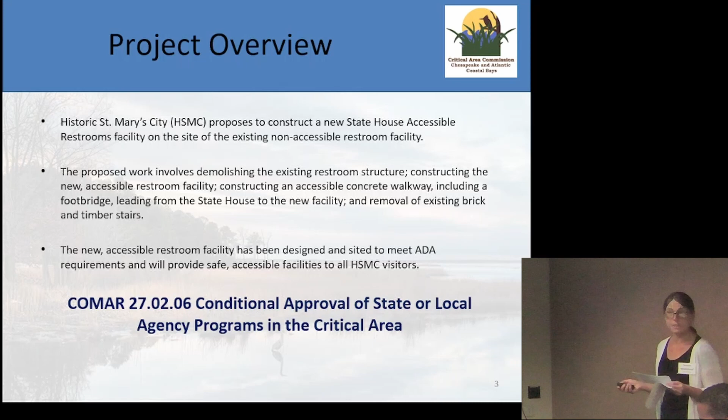This historic St. Mary's State House is a very popular tourist destination. The existing restroom facility is not ADA compliant and is located down a steep hill, accessed via brick and timber stairs. To ensure accessibility, the project includes an ADA-compliant pathway from the State House to the new facility and accessible restroom features in the interior of the structure. The existing brick and timber stairs will be removed and the area will be restored and replanted with native species. The project has an anticipated start date of fall 2022, with construction expected to be complete by spring 2023. The project requires conditional approval under COMAR by the Commission because of the buffer disturbance and impacts to steep slopes.

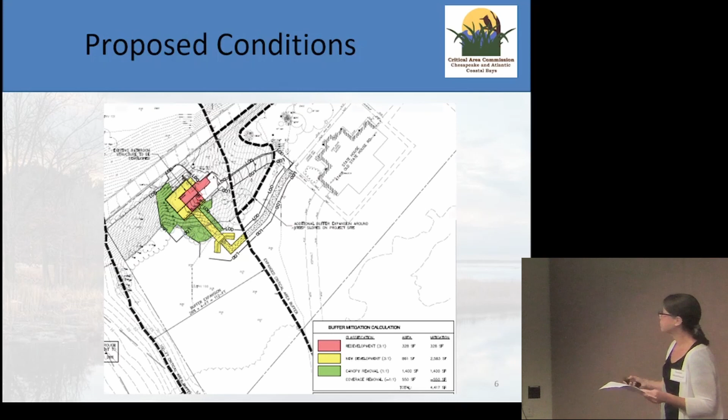Regarding critical area impacts, there are no impacts to tidal or non-tidal wetlands or any other habitat protection areas other than the critical area buffer.

Within the project site, existing lot coverage is 0.01 acres and proposed lot coverage is 0.03 acres. The overall lot coverage on the State House parcel is 14%, which meets the 15% lot coverage limit within the RCA.

As noted earlier, the project will disturb the critical area buffer. Permanent disturbance is 1,189 square feet, and canopy removal within the buffer is 1,400 square feet. In addition, 550 square feet of existing lot coverage within the buffer will be removed, and the area will be restored and revegetated.

The project is proposed by a state agency, and therefore it must meet the critical area 10% phosphorus reduction requirement, which is 0.03 pounds of phosphorus per year for this project.

Due to the potential to impact archaeological resources, no on-site stormwater management facilities are being proposed. Instead, the critical area 10% requirement will be met through planting and the installation of one 50-gallon rain barrel.

The required buffer mitigation for the project is 4,417 square feet, and 2,640 square feet of planting is required to address the 10% pollutant reduction.

The total planting is 7,057 square feet, and this will be met with both on-site and off-site plantings. Approximately 4,000 square feet of planting will be provided on-site, and 3,100 square feet will be provided off-site.

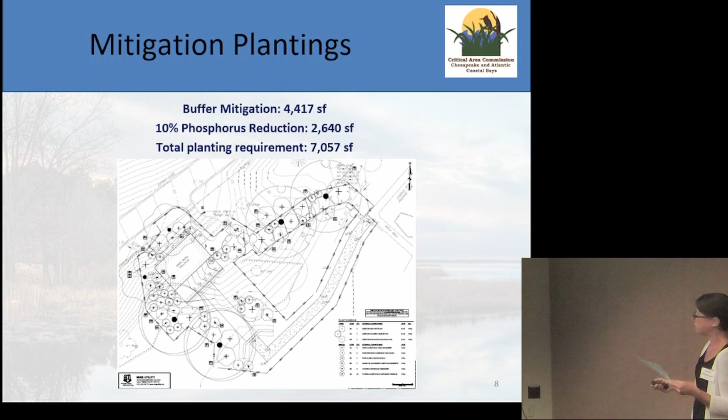So regarding agency reviews, stormwater management is not required because the project LOD is less than 5,000 square feet. Sediment and erosion control was approved by MDE on May 25th, 2022.

DNR Wildlife and Heritage Service confirmed in a letter dated April 2nd, 2022, that there are no official records of any state or federal listed, candidate, proposed, or rare plant or animal species on the project site.

And for MHT, in a letter dated June 17, 2022, MHT determined that the project would constitute an adverse effect on the historic property. Historic St. Mary's City agreed to fulfill 2 conditions related to recordation and archaeological monitoring to satisfactorily reduce this adverse effect.

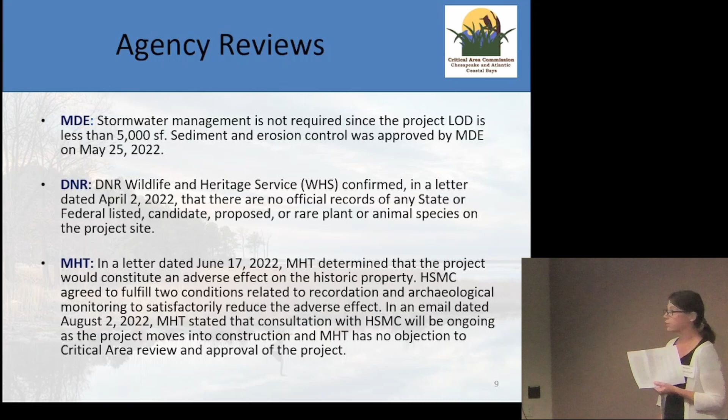In an email dated August 2nd, 2022, MHT stated that consultation with Historic St. Mary's City will be ongoing as the project moves into construction, and MHT has no objection to critical area review and approval of the project.

So COMAR 27.02.05.03 requires state agencies who are proposing development activities on state-owned lands to demonstrate that the agency has considered the likelihood of inundation by sea level rise over the course of the design life of the project, and to demonstrate that the development identifies and incorporates climate resilient practices in order to avoid or minimize environmental or structural damage associated with the coastal hazard, an extreme weather event, sea level rise, and other coastal impacts.

Historic St. Mary's City completed a coastal resiliency analysis for this project. And based on this analysis, the entirety of the project site is located outside of vulnerable areas.

The closest wetland adaptation area is a low priority area located southwest of the site. And in addition, the project is not located within the 100-year or 500-year FEMA floodplain.

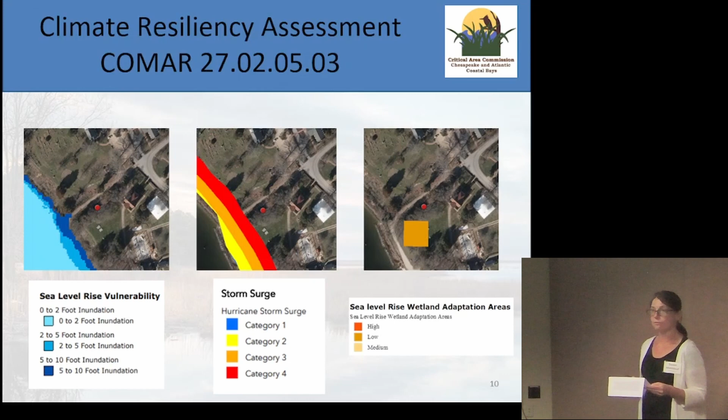As required by COMAR 27.03.01.03, public notice of the project is required. An ad was published in the Southern Maryland News on August 5th, 2022, and a sign was posted on the site, and no comments were received.

So as noted earlier, the project will result in buffer disturbance and impacts to steep slopes. Therefore, conditional approval by the Commission is required. As discussed on the next slides, Historic St. Mary's City has submitted information to meet the conditional approval requirements.

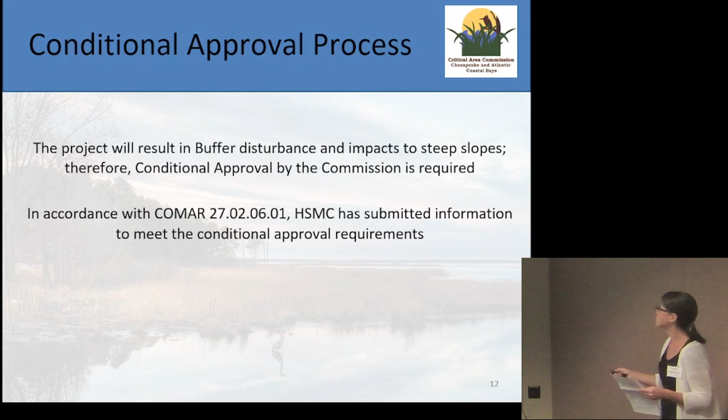So Historic St. Mary's City must show that if the law were literally enforced, special features would prohibit this project. The existing topography and the existing restroom facility make it impossible to avoid buffer disturbance and impacts to steep slopes. These impacts have been minimized to the extent possible while still achieving the project goal of providing accessible restroom facilities to all Historic St. Mary's City visitors.

Rebuilding on a site that has previously been developed also minimizes impacts to sensitive archaeological areas. The reason for this is that it avoids potential archaeological impacts at a new, completely undeveloped site. The project otherwise provides substantial public benefits to the critical area program.

The proposed mitigation plantings will provide water quality and habitat benefits both on-site and at a nearby off-site location. The plantings within the steep slopes on-site will have the added benefit of stabilizing the slopes and reducing runoff. In addition, the existing brick and timber stairs located within the steep slopes will be removed, and the area will be restored and revegetated with native shrubs.

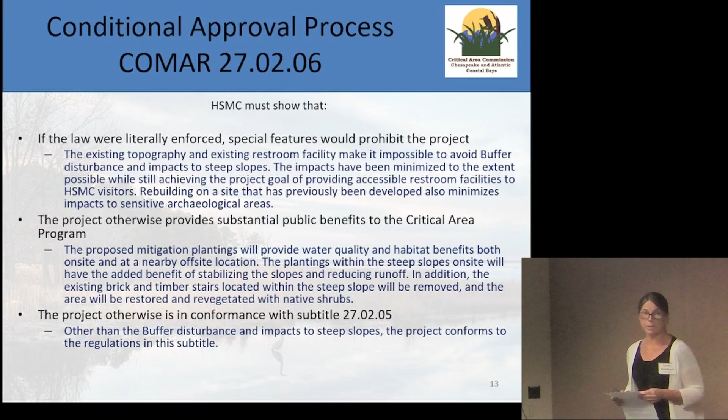The project otherwise is in conformance with Subtitle 270205. Other than the buffer disturbance and impacts to steep slopes, the project conforms to the regulations in this subtitle. So the conditional approval request must also include the following information.

Literal enforcement of COMAR 270205 would prevent the proposed activity. If the buffer disturbance impacts the steep slopes are not allowed on this site, it would prevent Historic St. Mary's City from meeting ADA requirements for accessible restroom facilities.

The proposed design includes ADA-compliant restroom facilities and an accessible pathway between the State House and the restrooms to ensure access for all Historic St. Mary's City visitors. The project conforms insofar as possible with the approved local critical area program. Other than the buffer disturbance and impacts to steep slopes, the proposed project does conform to the criteria in 270205. And mitigation measures are proposed to offset adverse effects.

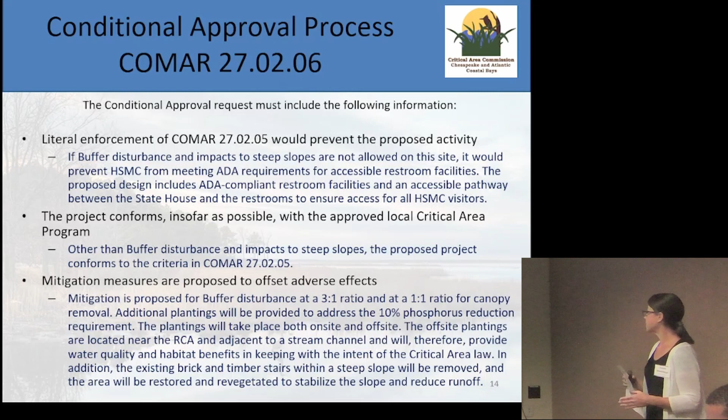Mitigation is proposed for buffer disturbance at a 3-to-1 ratio and an additional 1-to-1 ratio for the canopy removed. Additional plantings will be provided to address the 10% phosphorus reduction requirement, located both on-site and off-site. The off-site plantings are near the RCA and adjacent to a stream channel, providing water quality and habitat benefits in keeping with the intent of the critical area law. In addition, the existing brick and timber stairs within that steep slope will be removed and the area restored and revegetated to stabilize the slope and reduce runoff. So staff recommends approval of this project.

I'll turn it back over to Ms. Hertz for discussion of questions. I have a question. You mentioned about the canopy, the replacement of the trees. Why do you always do just a 1-to-1?

Because probably half of the trees that get planted die. For the buffer disturbance itself, it's 3-to-1, and then there's an additional 1-to-1 - that's the requirement in COMAR. So for every tree you take in a buffer, you plant 3 for the buffer disturbance, and any other additional tree outside the buffer is on a 1-to-1 basis. For canopy removal within the buffer, it's 1-to-1, so it's an additional requirement on top of any buffer disturbance - so it's actually 4 in the buffer and then 1 outside the buffer. Okay, gotcha, thank you.

You're welcome, thank you, good question. Any other questions from Commissioner? It was a very good presentation. Thank you, I certainly plan to approve this.

I just have a general question. It sounded like there were going to be archaeological impacts, whether on this site or a new site, and I was curious if any alternatives had been considered at a different location to avoid buffer impacts.

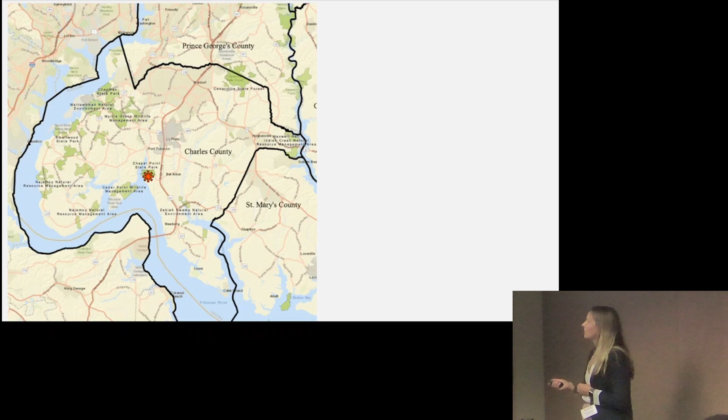The proposed improvements are part of the lease agreement, as I mentioned earlier, between Maryland Park Service and Charles County Department of Parks, Recreation, and Tourism. The terms of the lease agreement were based on a jointly prepared and approved management plan to better define access, shoreline access, and parking areas.

Just before we get into it, a little brief, interesting history of the site. It houses the oldest Catholic parish in continuous service in the U.S. It's called St. Thomas Manor at St. Ignatius. It was founded in 1641 by Jesuit priests.

In the 1880s, the Jesuits formed a joint venture with the Howard brothers to build the Hotel Bellevue. This was a riverside resort to draw people in from Washington by steamboats. In the 1930s, a gentleman named Ben Bowling purchased the property from the Jesuits to build an amusement park called Chapel Point, the Pride of the Potomac.

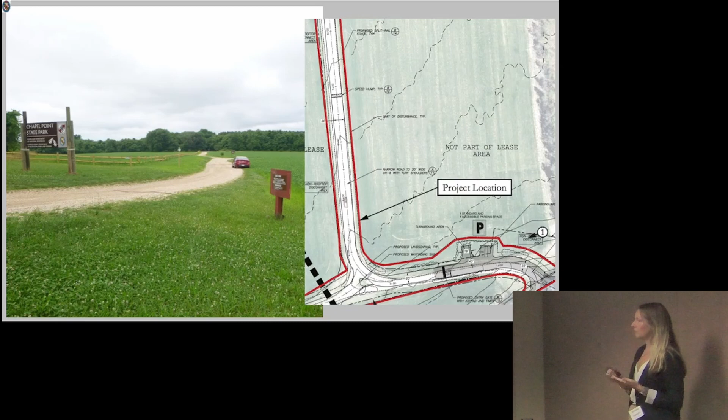Here is the entrance of Chapel Point Park. You're looking at it around here on the site plan, continuing this way to North Fisherman's access, and here towards Midway Beach access. Again, a lot of the proposal involves improving existing gravel drives, paving, and expanding some of the drive access in certain areas to allow for better two-way traffic. You can see it's pretty narrow in some spaces.

A detailed list of the scope of work is listed on page 2 of your staff report.

Here is the North Fisherman access parking. They are going to improve and pave this area. There are areas outside of the existing parking defined areas that people are using and compacting on a daily basis. They're seeing increased visitation, so they will be expanding some parking in certain areas, but again, the areas they're expanding are currently being used.

They are providing a reinforced turf and turnaround area down to the access to the water. They are installing a gate for permitted access only, for fishermen to bring their boats and their catch. They're reinstalling new kiosks for information, trash receptacles, and maybe one or two porta potties in this area.

This is looking at the access way and where the maintenance pole barn building and parking will be. This is a fallow field currently. They're also providing stormwater management in that area.

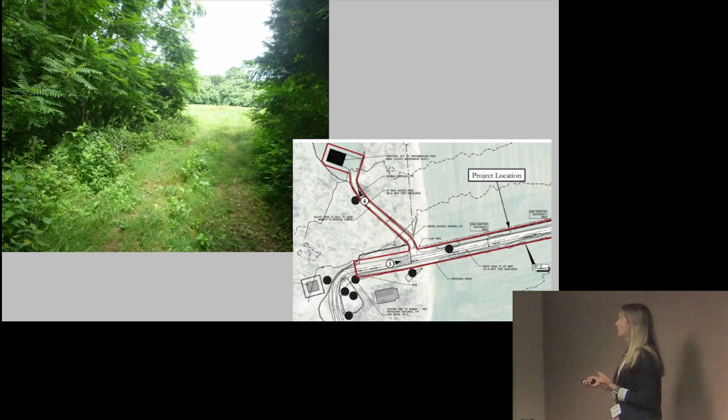So now I'm going to continue down to the Midway Beach access drive and the shoreline access point. Here, they are expanding and providing additional parking where the existing tree line is currently located. We did walk the site with our science advisor, Claudia Jones. This is considered forest interior dwelling species habitat.

However, I'll show you in the photos in a moment, but a lot of the edge areas where the parking areas are being proposed, highly invasive Ailanthus, or tree of heaven, and other invasive species are pretty dominant in that area.

There's also a historic corn crib on the side of the access drive that they will be placing a stabilized fence around. They will install a couple porta potties along the way, and new informational kiosks down here, improving and paving the access drive, putting reinforced turf down at the bottom. Again, this is for hand carry watercraft only.

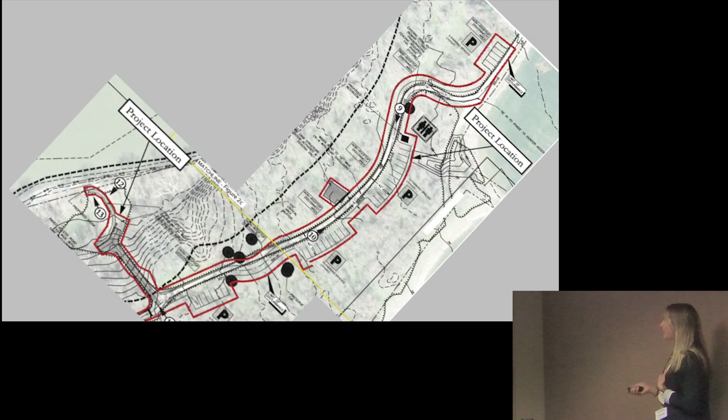This is the Midway Beach access drive. They will be improving this road, expanding it slightly, mostly for the shoulders, but providing parking in certain areas along the side.

As noted, this is coming to you as a conditional approval, and the reason for that is there are non-water dependent buffer impact areas. This is shown as attachment 2 to your staff report. The buffer line is the darker hatching line style noted here.

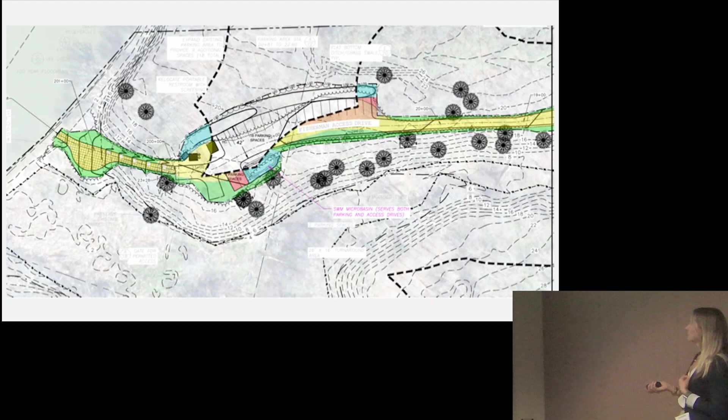So overall impacts, I broke down on page 3 of your staff report: buffer impacts by water dependent, additional canopy removed, and non-water dependent. Each activity type has a corresponding ratio. There's also, as I said, forest interior dwelling species, or FIDS, habitat impacts, so forest clearing outside of the buffer as well, for a total of 2.27 acres of required mitigation.

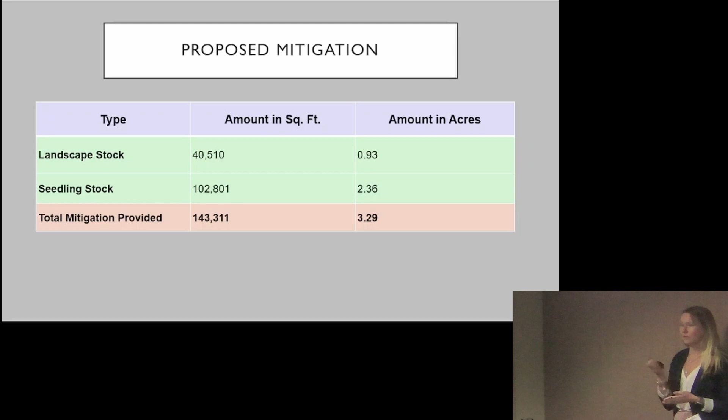The county is proposing to mitigate at least a 1-to-1 ratio back in the buffer. It turns out to be more, but they're at least getting the 1-to-1 back in the buffer with native understory, canopy, and herbaceous species. They're also planting in areas to enhance existing FIDS habitat by providing landscape stock and seedling stock mixture. They're providing 3.29 acres, over an acre more than the required mitigation, back on site.

For permit review and agency review, the county has received approvals in the local stormwater and erosion and sediment control plans. They received response from DNR Wildlife and Heritage Service that the forest area on site is for interior FIDS habitat. The guidelines of their proposal have been followed, so that's why mitigation is at a 1-to-1 ratio for the forest clearing. It also noted that the waterway is a waterfowl concentration area, however there's no in-water work being proposed at the time of this project.

MHT noted that there are 2 recorded active archaeological sites, however this proposed project will have no adverse effect. U.S. Fish and Wildlife Service indicated there's no critical habitat, refuge lands, or fish hatcheries in the project vicinity, and the county met their public notice requirements.

So again, this is coming to you as a conditional approval. In order to qualify for consideration by the commission for conditional approval, the county has to show that the project meets certain standards. The county has provided a very detailed response to all the questions that Susan went through previously. I think it's page 4 through 6 on your staff report, but I will just briefly summarize. Again, this project is directed by a management plan per a lease agreement through Maryland Park Service and the county.

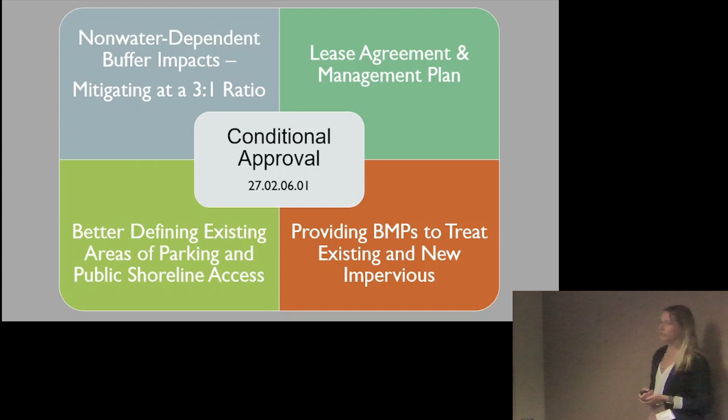They are providing best management practices on site to treat existing and new impervious surface. They are basically better defining existing areas of drive and parking and providing new parking for an increase in visitation to provide public access to the water. And they're mitigating their non-water dependent buffer impacts at a 3-to-1 ratio. So with that, staff recommends approval of the project, and I'll turn it over to Commissioner Sandy Hertz for any questions or comments. Thank you.

Thanks for the presentation. I did have a question related to the ailanthus and the invasive species on site. Is there a plan to do invasive species control or removal? And then a second part of that question is, how are you going to ensure that any seedlings or nursery stock that is planted is not outcompeted by the tree of heaven?

So there is, in the general planting plan, invasive species control and assurance that they get the required amounts of plantings. Obviously with some of the lower stock you do see that some of that dies off just because of how it's a small plant. But there is a required amount that's supposed to be monitored per year, quarterly I believe.

When we were out there, we even saw some invasive species, not specifically the ailanthus but wavyleaf basketgrass, that they had already started removing. Park staff will monitor it on a regular basis to keep the invasive species somewhat under control. I don't think you can completely eradicate it, but the tree of heaven trees that are within the LOD will be completely grubbed, stump and everything will come out, so that'll help that process. Anything outside the LOD, we'll have to address accordingly since we can't grub it there, but we'll cut it accordingly.